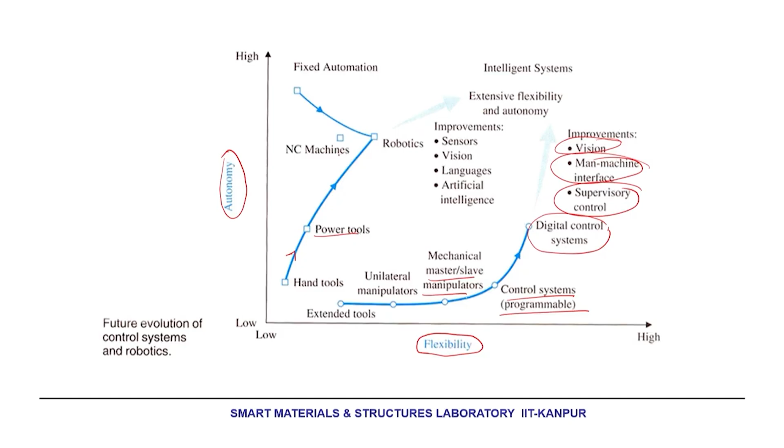On the other hand, if you look at autonomous systems, that means when the system can take its decisions on its own, starting from hand tools we go to power tools, and then from power tools we come to NC machines and robotics. Here we can also see that some of the power tools which have a high automation level can actually be remodeled into a robotic solution.

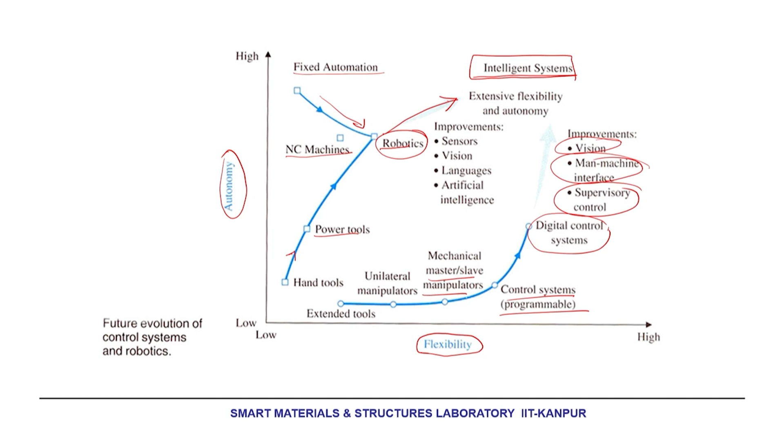If I further try to increase the autonomy or flexibility, it will land us in this part, where we finally get intelligent systems which are highly flexible and highly autonomous. That is what we are trying to achieve, and in order to achieve that we have to understand certain basics of control theory. That is what brings us to the picture of today's lecture.

For a cutting tool, it can be a particular type of force signal you would like to achieve. For vibration, it can be a particular type of displacement that you would like to achieve. For an automated car, it can be that you have a trajectory given which is to be followed, and currently, let us say, the car is heading in this direction.

That means my reference is this way and I am heading this way. So I need to modify myself so that I can turn towards the actual trajectory that I am supposed to follow. So that is the reference: the desired trajectory, desired line, desired shape.

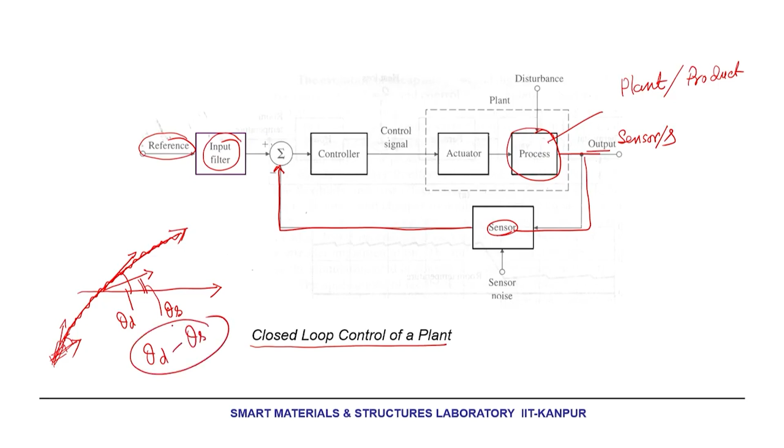this way. So, that means the difference, with respect to a standard x axis, between this angle, which is theta desired, versus this angle, which is theta sensed. So, theta d minus theta s is what is going to drive the system. You have theta desired here and theta s here. The difference between the two is going to drive the system.

And we have a controller here, which is what we learn how to design. In some cases we can keep a simple constant gain here, k. So, k times theta d minus theta s is going to drive an actuator. That actuator in the case of a car can simply be an engine. In many other systems, it can be something else, like a motor control, a hydraulic system control, whatever actuators we have learned earlier, an electromagnetic system or a smart actuator.

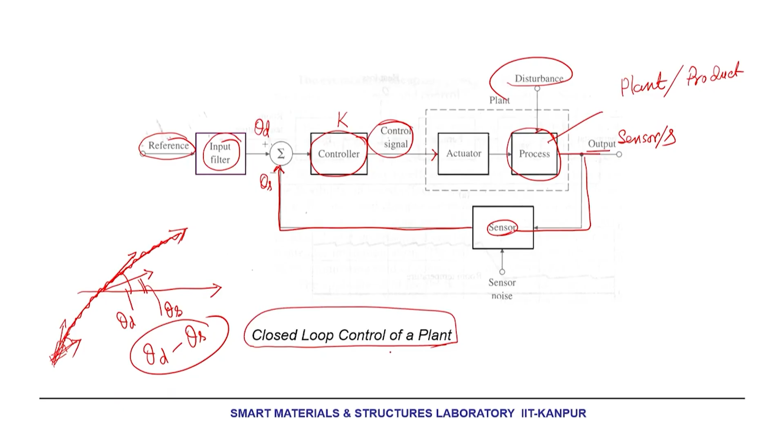So, that needs to be driven with the help of the control signal, and because of these additional inputs, there will be changes in the process. There will be some disturbances that can also get mixed in that process, and we measure the output and continuously rectify the process. This is the idea of closed loop control of a plant or a product.

Now, let us also think that simultaneously this entire thing is to be done in a domain which is mathematical in nature. So, we never directly put a controller and see the performance, because that can be catastrophic. Suppose you have to launch an aircraft; you do not try any new controller in it directly. You have to do it on a model first, satisfy yourself on the performance, then only you can extend the idea. So, modeling is equally important, and by modeling I mean a mathematical representation of the system dynamics.

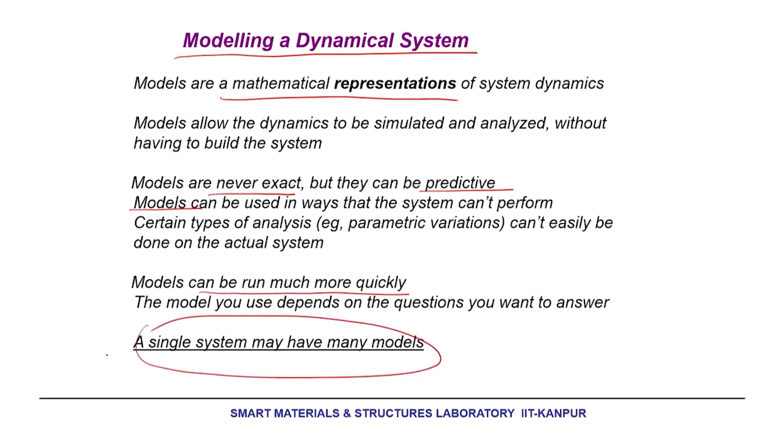And these models, please remember, are never exact, but they can be predictive models used so that certain types of analysis, like parametric variations, can't easily be done for the actual system. That is the requirement of the model, but a model can be simplified so that a particular type of behavior can be modeled, and models can then run much more quickly than the actual system. So, keep in mind that a single system may have many possible models.

Now, how do I model a system? A system may be modeled either by defining the input output characteristics or through a set of state variables. Input output characteristics: the input is the external excitation of the system, which is extrinsic to the system, and the outputs are the variables that are calculated or measured. Hence a relationship can come out like this, where u is the input and y is the output.

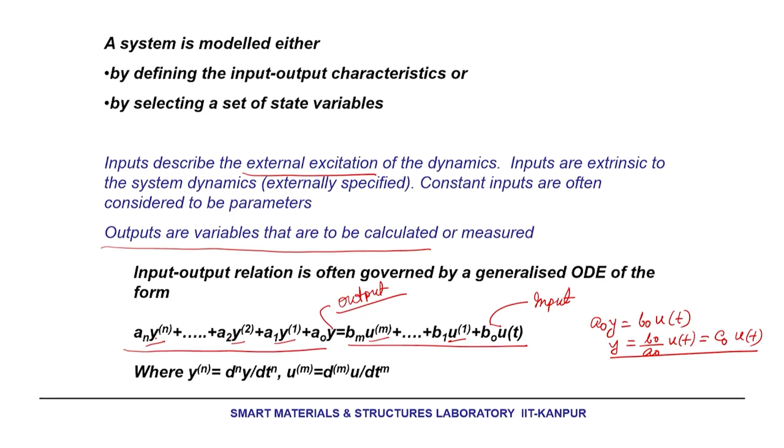Now, many a times y and u will not be simply connected. The simplest linear system is where I can write a0 y equals b0 u(t). In other words, y is simply b0 over a0 u(t), or some constant c0 u(t). So, this is the simplest one. Many a times the output can depend not only on the input, but on the rate of change of inputs. That is what u1, u2 to um talks about. Similarly, instead of only y, you can have y dot, double differentiation of y, up to nth. That is a very generic input output relationship of a system.

Now, keep in mind that the choice of inputs and outputs depends on the point of view. You have complete freedom to do that. Input is what factors are external to the model, and output is what physical variables you are actually trying to measure. When we go for state space, we will not look into the output directly, but into the exact parameters required to describe the dynamics of the system, such that it is a minimum set of parameters describing all the energies involved in the system.

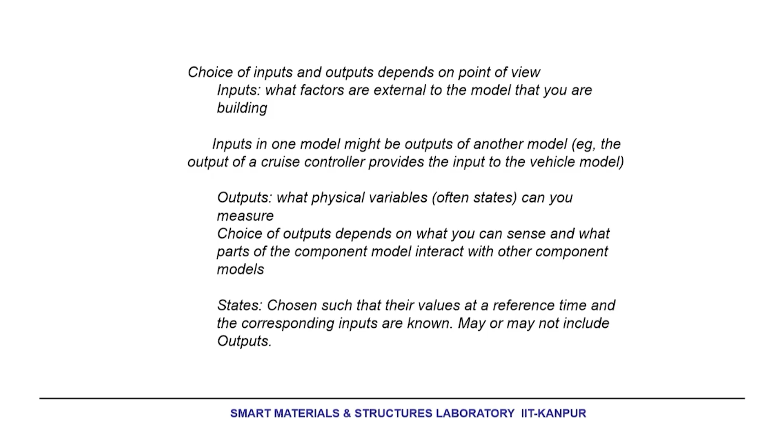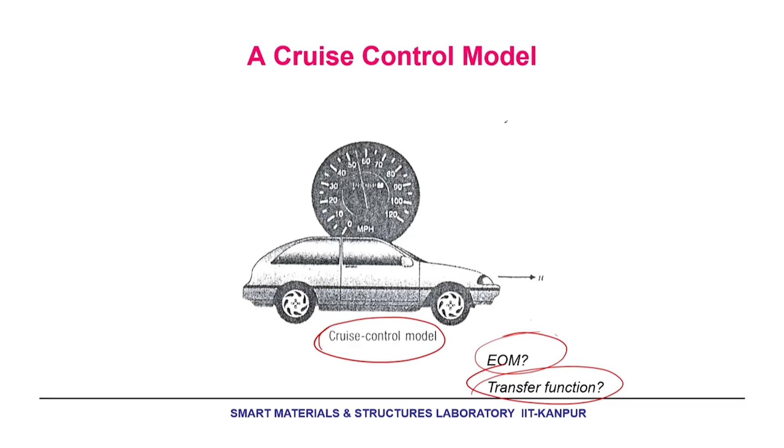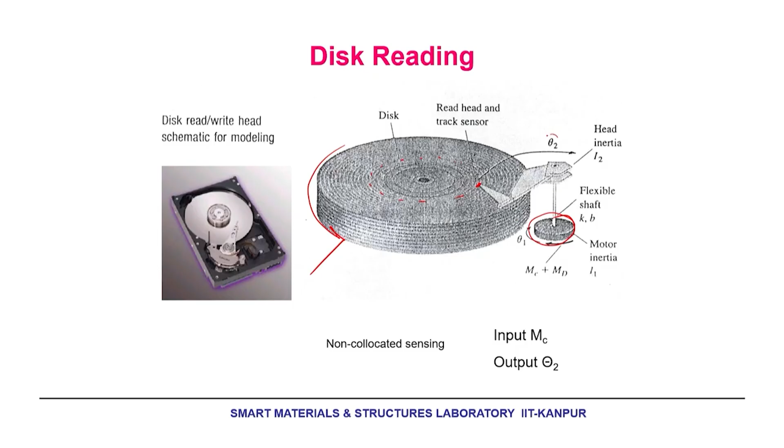Now, let us actually look into our first problem. In the first problem, let us say I have a system to measure the velocity of the car. Then what is going to be the governing equation of the system? Well, first, the car is moving in a particular direction, so it must have an inertia force. So, m u dot is representative of the inertia force. Second, as the car moves, there will be some resistance from air on the car, and that can be proportional to the velocity of the car. This is the velocity of the car. That proportionality constant is called the damping constant. So, that is plus d u.

So, if you draw the free body diagram of the system, there is a force that is driving the car. Of course, it is coming from the engine, and as it is trying to move this way, there is an inertia force which is m u dot, and there is a damping which is d u. So, the equation of equilibrium is m u dot plus d u must be equal to the force that is applied, and that is how we get the governing equation of motion of the system, EOM.

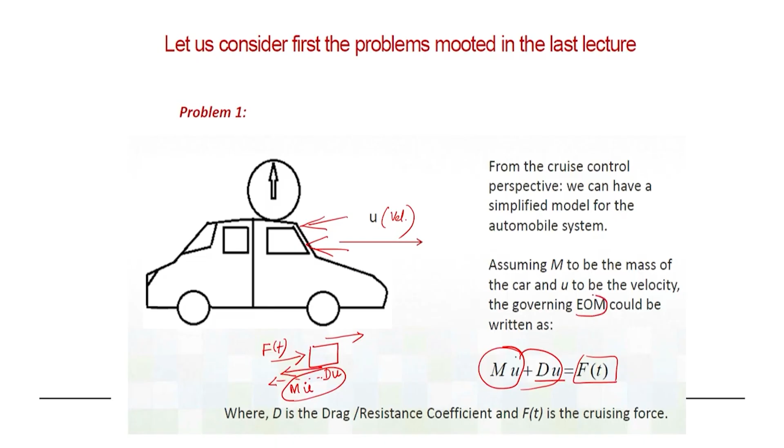In this problem, it is not translation, it is rotation. In this case, however, it is not just one body; there are two bodies here, one body here and this other system here. So, there are two rotations, one at the disk level, that is this theta 1 rotation, and another happening here. So, if you take I1 theta 1 double dot, which is the inertia force corresponding to this disk, then C times theta 1 dot minus theta 2 dot, which is the energy that is dissipated due to damping.

One additional thing would come here: if you consider this shaft to be flexible, then K times theta 1 minus theta 2, that is the force related to the flexibility. So, in this equation, the first term is the inertia force, the second term is the damping, and the third term is the spring force, resistive force from the spring. For equilibrium, all these three things together should be 0, or else, in the other case, there is a moment that is applied on the system. So, this is the way we can represent such a system.

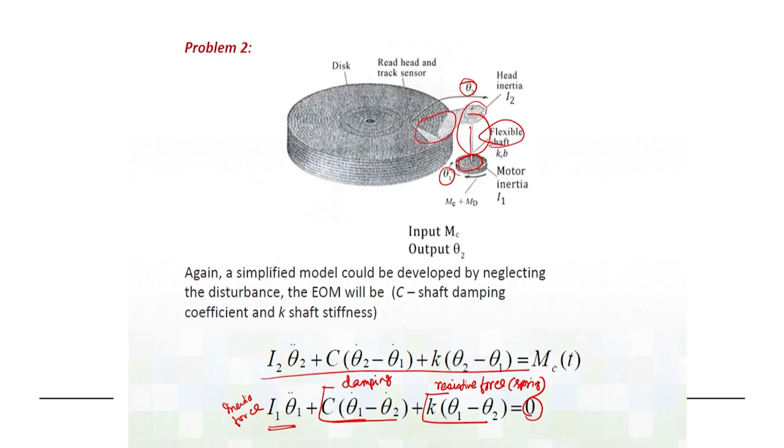Now, this is a kind of input-output relationship, and you can transfer this relationship into the Laplace domain. We do it many times because it becomes much easier for us in terms of representing the transfer function, representing the system as a set of algebraic equations. In the first case, if you remember, we had m u dot plus d u; let us write it as m u dot plus b u equals f. Now, if I apply a Laplace transformation to this equation, it becomes s m U(s) plus b U(s) equals F(s).

This is Laplace transformed. So, after a simple algebraic manipulation, I can write it like this, which means U(s) over F(s) will be equal to 1 over s m plus b. And similarly, in the second system I can write it as this. Now, keep in mind that in this case the system is first order, and in this case the system is second order.

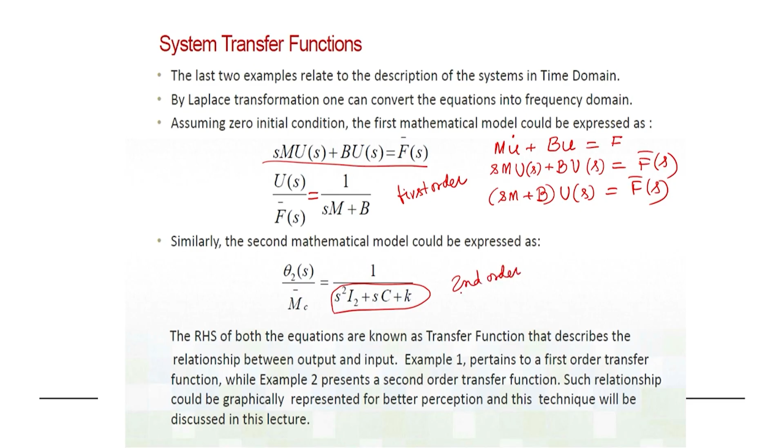Now, on the state space modeling, because that is another way of representing the system, we have to keep in mind that this is, as I told you, a set of independent physical quantities, the specification of which, in the absence of excitation, completely determines the future evolution of the system. Okay. So, independent physical quantity is something that I also referred to as the minimum number of parameters that are required.

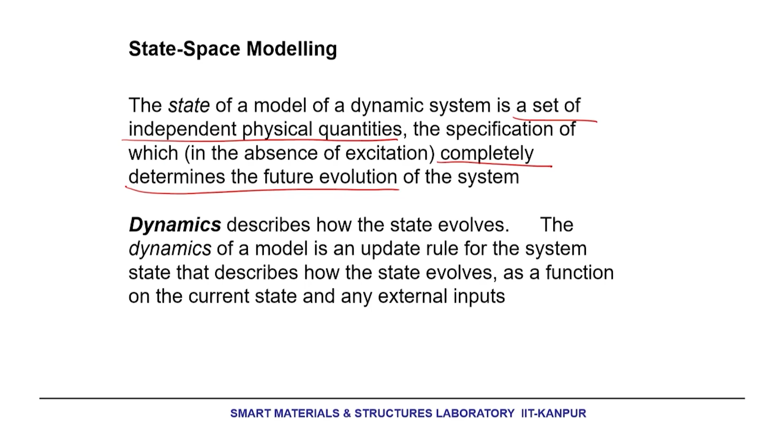Now, let us look into this further, how do we determine what are the minimum numbers, and for that matter we have to keep track of what are the different energies involved in the system. Okay. So, for example, when a ball is falling down, what are the different energies that will be involved in it? Of course, the kinetic energy of the ball.

So, if this ball is of mass m, then it must be something like half m v square, and let us say I define it with respect to the height h, then you can write it as half m h dot square. And then what is the potential energy? So, this is the kinetic energy, potential energy is mgh, right. So, if these are the two things that are required, then definitely you must have two states here, h and h dot, in order to define all the energies involved in the system. That is what we have told here.

Now, the state space modeling through this tracking will actually give us a governing equation of motion, just like we have obtained in the other case. The only point here is that for state space representation, we will be happy to keep the relationship in time domain, whereas in the other case we represent it generally in the frequency domain.

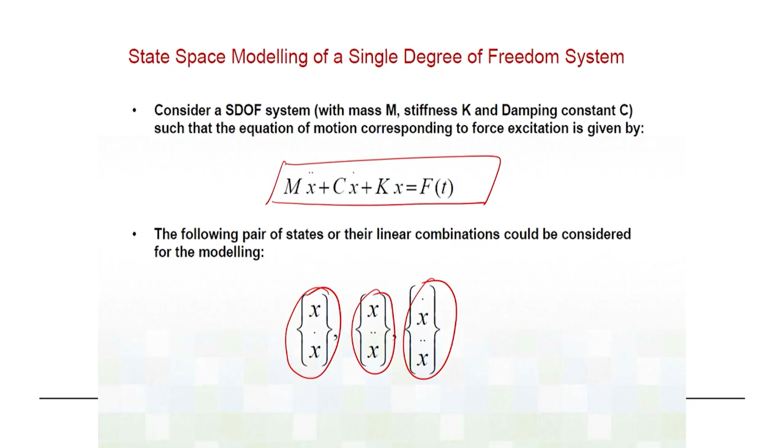Now, once I get this equation of motion, I know what my states are, like in this case 2 states are required. So, I can choose between position and velocity, or position and acceleration, or velocity and acceleration, any two. That is my minimum set. State space beauty is that it need not be unique, but the number is constant in each and every case. So, like in this case, if I consider x and x dot as the two state vectors, then I can write down that earlier equation in terms of a first order state equation.

Okay. So, you can just try it yourself, it is very simple, something like m x double dot plus c x dot plus k x equals to f(t). That was what we had, let us say, with small m, small c and small k. Then I can write here x double dot plus c by m x dot plus k by m x equals to f(t) by m.

And then I am writing these two states. So, very simply, this is my first state x1, this is my second state x2. So, x1 is x and x2 is x dot. So, now I can write the first kind of identity, that x1 dot, which is x dot, equals to x2. This is the first identity we can simply see, and you see everything is to be in first order.

Then I can write the second equation in terms of the states here. So, what will be x double dot? X double dot will be x2 dot. We already know c by m x dot is simply c by m x2, and k by m x1, equals to f over m. I am just keeping the t out because it is implicit, there is a time there. So, now we have two state equations.

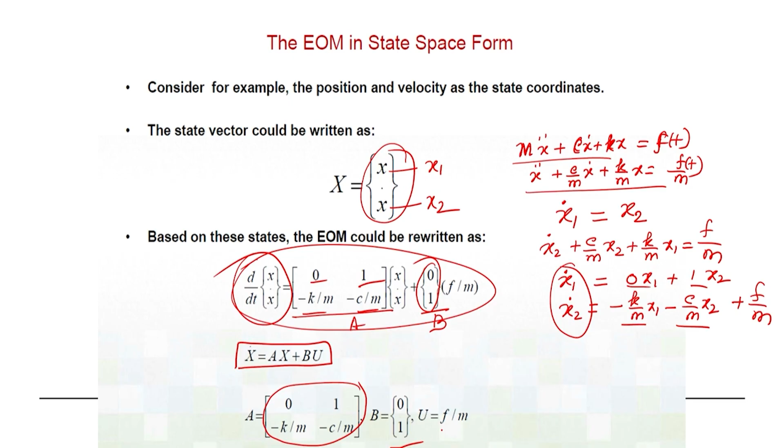Now, the output of a state space system can be defined in terms of the states. So, it can be something as simple as y(t) equals to some constant times the states, but if the input disturbance is also affecting, then I can have some extra term like Du in it, but in general D is 0. Now, if I get this type of equation, that is x dot equals to Ax plus Bu and y equals to Cx plus Du, your natural question will be how do I solve it?

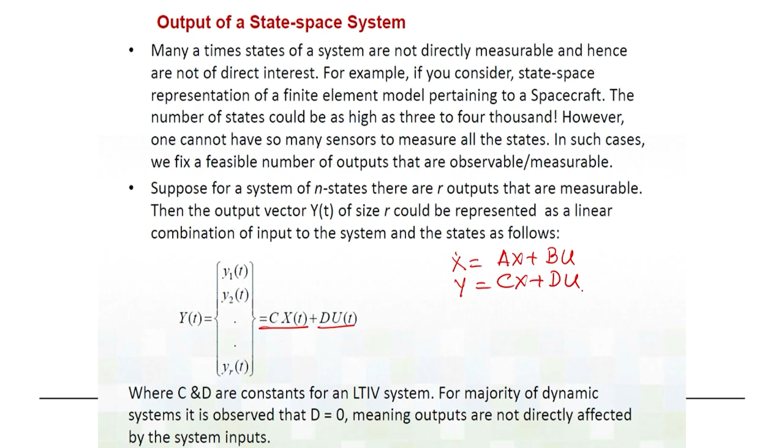That means how do I get x? Okay. So, this I can get just like the integration factor that you have done for first order equations. Only thing here, it is a matrix equation. So, you get x(t) as e^(At) x(0) and the additional part as integration from 0 to t of e^(A(t - tau)) B u(tau) d tau. Okay. So, this should be B u(tau) d tau.

And remember that e^(At) is a matrix, where I is an identity matrix. Okay. And once I get this, I can also of course write this equation in the Laplace transformation domain. I can write it as X(s) equals (sI - A) inverse B U(s), and that way I get a Laplace transformation and the corresponding transfer function of the system.

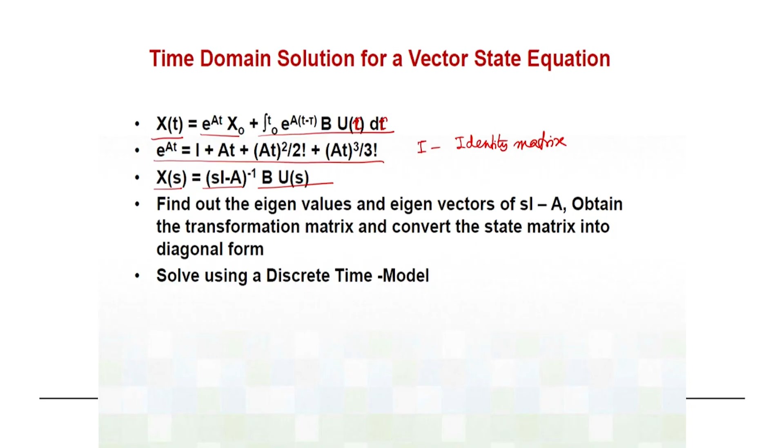Now, you check yourself whether you can do this problem. Like let us say I have two bodies, two masses interconnected by a spring and dashpot, and some force is working on it. Can we find out what will be the state space representation of the system? But try it with this pulley system also and check whether you can do it.

For that automobile, I can go further, like I can put some mass here and then some mass for the seat, and then the seat damping, seat spring, then the tires and the front spring, front absorber, front tire, rear spring, rear absorber, rear tires. So, then I get a complete model of the system. Sometimes, as I told you, models need not be unique, models can be simplified also. In this case, what is the simplification?

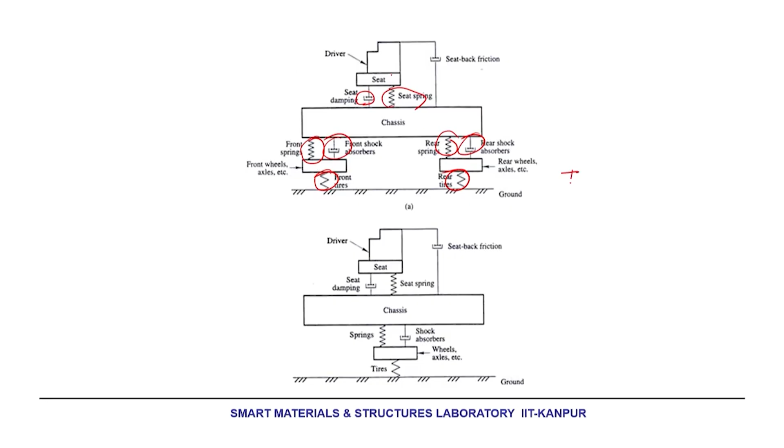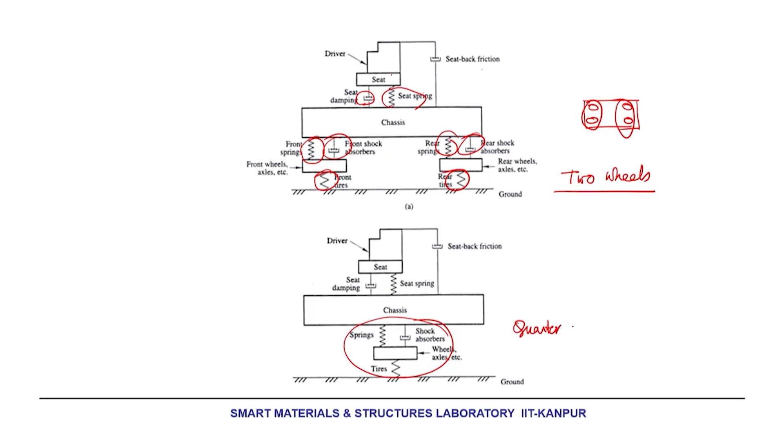Like an automobile is having 4 wheels, but I have reduced it to 2 wheels. That means, even though from the top view you can see there are 4 wheels there, I can keep a set of this and a set of this, so that ultimately it becomes an equivalent 2 wheel system. Further, I can integrate this also and get it as a single wheel equivalent system. We will call this a quarter car model. So, this is the most simplified model of the system.

Now, while doing this, you may come across nonlinearities, something like the stiffness is nonlinear, which means at different values it is going to have different stiffnesses. So, you can accordingly consider the nonlinearity in the system.

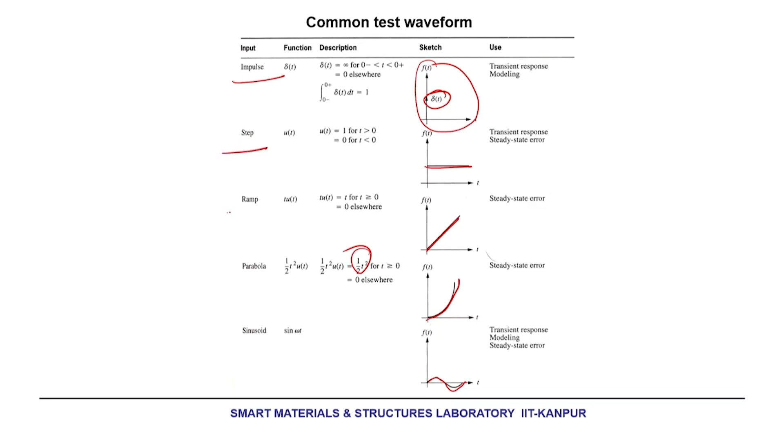Now, here are some very common test waveforms. If it is an impulse signal, this input will look like a Dirac delta function. If it is step, it is something like this. If it is ramp, this is it. If it is parabola, it looks like this, half of t squared, and sinusoidal, of course, is a sinusoidal signal. So, for any mechanical system where you are trying to find out the response, instead of trying arbitrary inputs or excitation, we generally model it against one of these: impulse, step, ramp, parabola or sinusoid. So, you need to keep these inputs always in your mind.

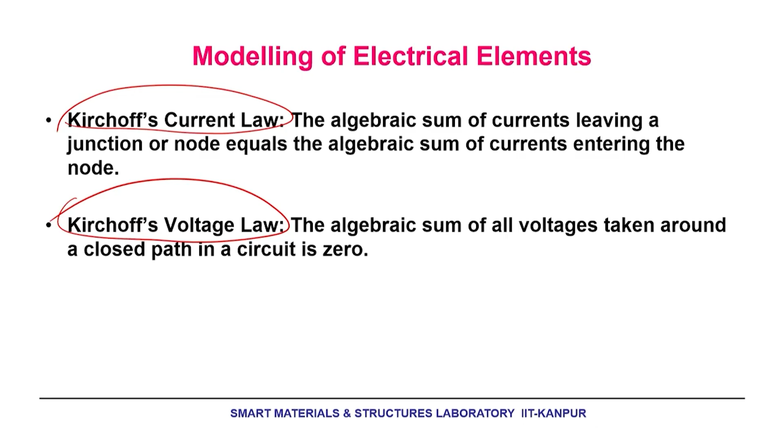Now, whatever I have done for the mechanical system can also be done for the electrical system by following Kirchhoff's current law and Kirchhoff's voltage law. That is, the algebraic sum of currents leaving a junction or node equals the algebraic sum of currents entering the node, and the voltage law states that the algebraic sum of all voltages taken around a closed path in a circuit is 0.

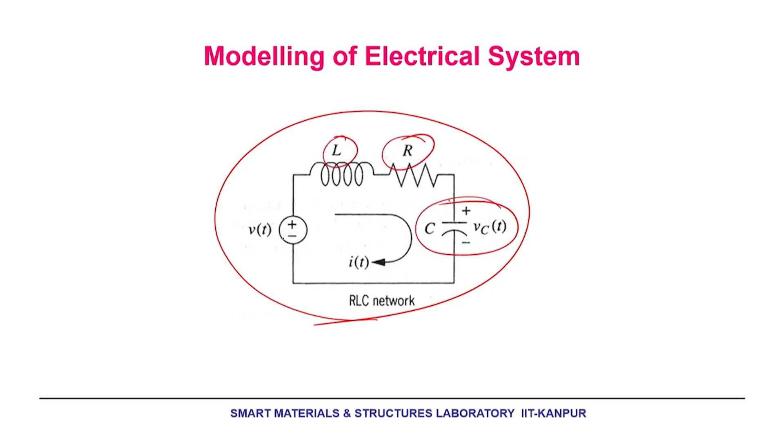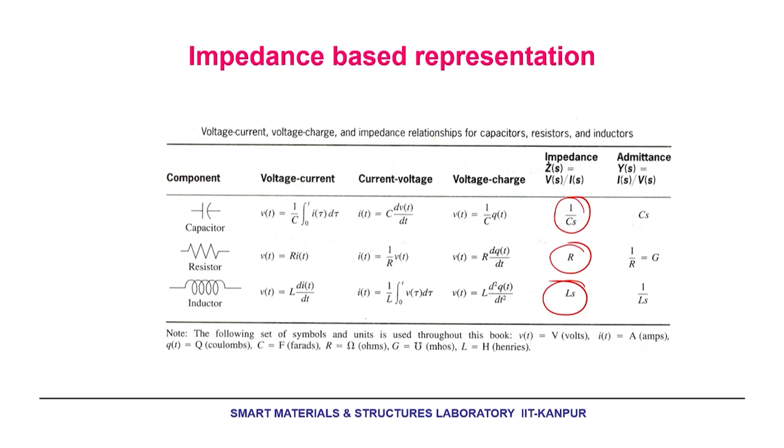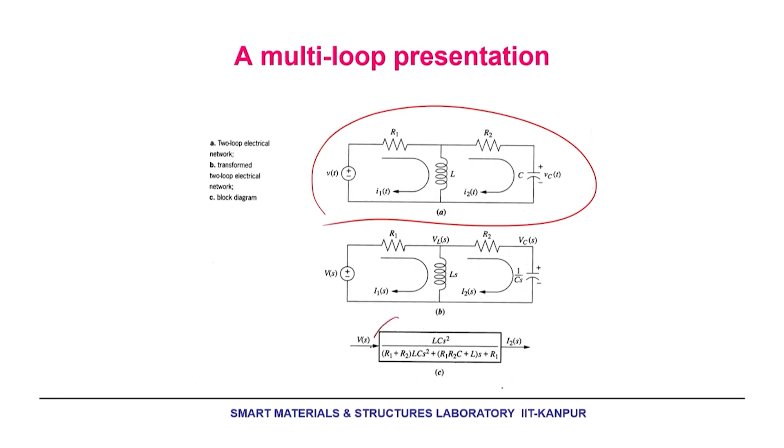So, we can adopt this for an LRC circuit, an inductor, a resistor and a capacitor, with a voltage in it, and we can also create their impedances, their representation in the Laplace transformation domain, and we can get the equation of motion of the system. Something similar we can do not only for one loop, but also for a 2 loop system, and you can see this is the transfer function that will come out of it. It will be a good idea to practice such a system.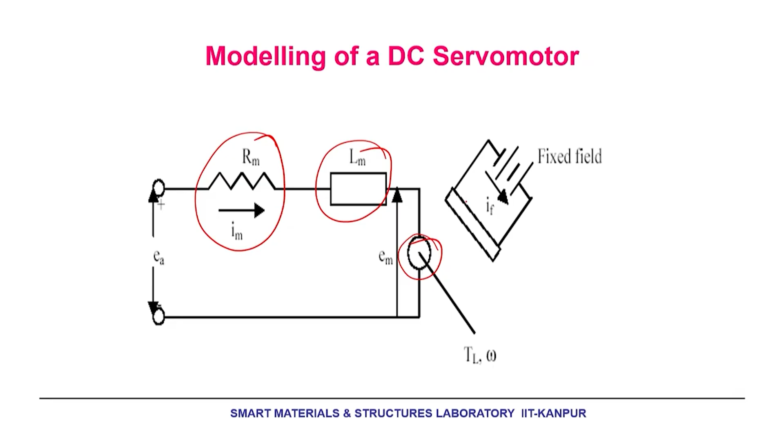And suppose I now know how to describe a system. So, if I go for modeling of a DC servo motor, what would it involve? Well, here also it would involve a resistor, an inductor, and there will be the mechanical system which is getting rotated, and of course, there is the field current that will be produced by the electromagnetic system. So, in the next lecture, I am going to talk about how to model this DC servo motor. Thank you.